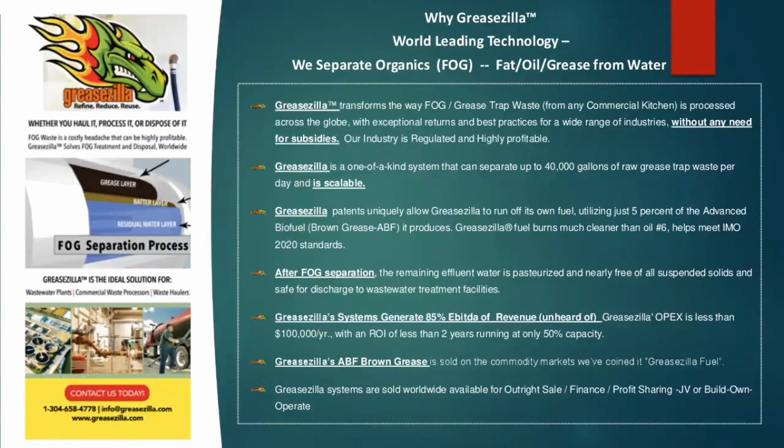It's actually a drop-in substitute for bunker fuel number 6, but we burn much, much cleaner and actually can help maritime fuel producers meet IMO 2020 standards. We sell the systems worldwide, outright sale, lease, finance. There's a profit sharing program we have. We will joint venture with communities, and we have a build, own, operate system as well. So we're very excited about our product and looking forward to increasing that penetration worldwide. Brian?

Excellent. For those of you that have ever been in the waste to fuel sector, you know, CapEx, IRR, return on investment, getting your hands on the feedstock, being able to sell the offtake in a practical fashion, permitting, emissions, these are all the intricacies, the devil in the detail in the industry. When Greasezilla was formed, it was formed by a waste processor who was trying to simplify the process. So our systems sell for less than $1 million, and as Bill said, with a 2-year return on investment.

When we started the business, we were focused more on the wastewater treatment infrastructure, dealing with cities and municipalities and state governments, and the hauling industry.

But as we all know, customers can take you down some interesting roads. So today we're proud to serve 5 different industry verticals. We are in the wastewater treatment facility. We will show you some of those in a moment. We deal extensively with commercial liquid waste processors and FOG haulers all around the country. But our product is ending up in the biodiesel sector, which we'll talk about a little bit further.

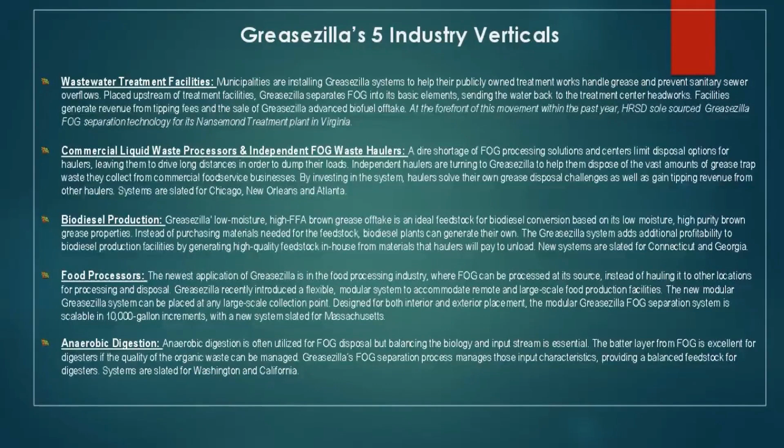The food processing sector: even during COVID, we may not be going to restaurants the same way we used to frequent them, but we are certainly buying foods from the grocery stores at increasing rates, and our systems are now sitting at food processing locations, upstream of anaerobic digester facilities, upstream of biodiesel facilities. So our customers are helping us to grow in areas that we never even conceived of in the early days.

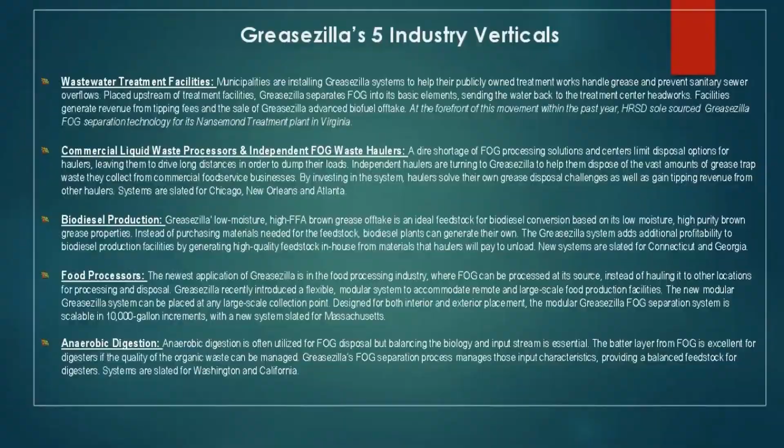Bill, could you walk everybody through what goes on inside the reactor? Yeah, imagine, if you will, trucks that are going to restaurants and pumping grease traps, 1,000 or 1,500 gallon grease traps, pumping them into the truck, going from 2 or 3 restaurants, and then going to a FOG receiving station, at which time they're going to discharge that truck through some type of a grate or screen that's going to get the occasional fork, knife, napkin, or brick, and keep that out of the system.

And then we recommend that that liquid waste goes into decanting. Grease worldwide is suspended in the solution at about 5% concentration, so you've got a lot of water in this liquid, and the more that can be decanted off to begin with is going to make the process that much more efficient. After decanting, this is a cutaway view of a 10,000 gallon tank, a reactor tank that we heat in our proprietary process for 18 to 24 hours.

And after that heating process, the system separates into the rich brown grease layer, then a batter layer. And if you will imagine a fried chicken restaurant or Mexican restaurant, Chinese restaurant, a lot of batter goes into frying. So think of your pancake batter, about 500 gallons of that as a layer, and then about 8,000, 8,500 gallons of pasteurized water. We harvest the brown grease off.

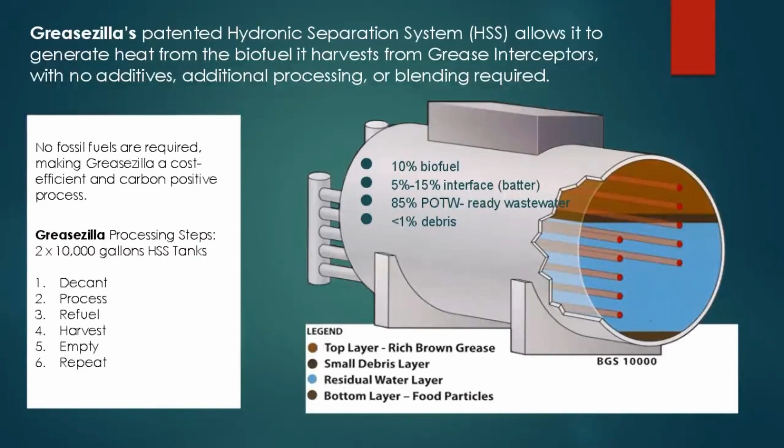Okay. We are in wastewater treatment plants in various locations around the country and the world. This is Wareham, Massachusetts, which is on the Cape, south of Boston, a very, very highly environmentally sensitive area. This system's been up and running a little bit more than 5 years now, at about 50% capacity. And one of the neat things that's happening with this site is the wastewater treatment plant is generating over $500,000 a year in additional revenue due to tipping fees and the brown grease sales that they're able to use for whatever purposes they need. Brian?

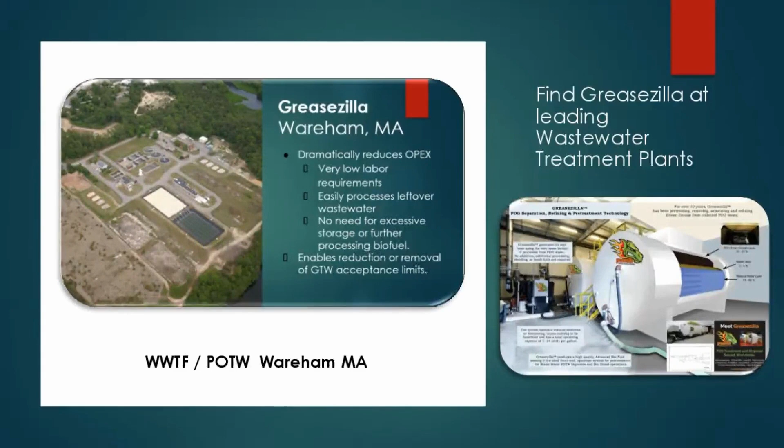So as Bill said, we are active in the wastewater treatment sector. Here is a facility that is recognized globally. This is Hampton Roads, a sanitation district in Virginia, near Virginia Beach. This authority happens to run some 20 different facilities. So they do push the envelope. They are testing technologies, and the world is watching. Greasezilla is very proud to be part of this prestigious environment.

And this site, which will open in 2021, was conceived by Hampton Roads Sanitation District and engineered by Jacobs Engineering. So this type of presence is helping us globally. One of the interesting aspects of this site, and I'm sure a lot of the people on this phone would recognize this as quite an unusual achievement: we were sole sourced.

So dealing with a state and dealing with a water authority, the commission sole sourced Greasezilla technology, primarily for three reasons. Number one, we were the only system that truly did run off of a small percentage of the fuel that it harvested. Secondly, we were the only company that really truly mitigated landfill policies, which the state was extremely focused on. And we were the only organization that would actually provide an aftermarket for the brown grease.

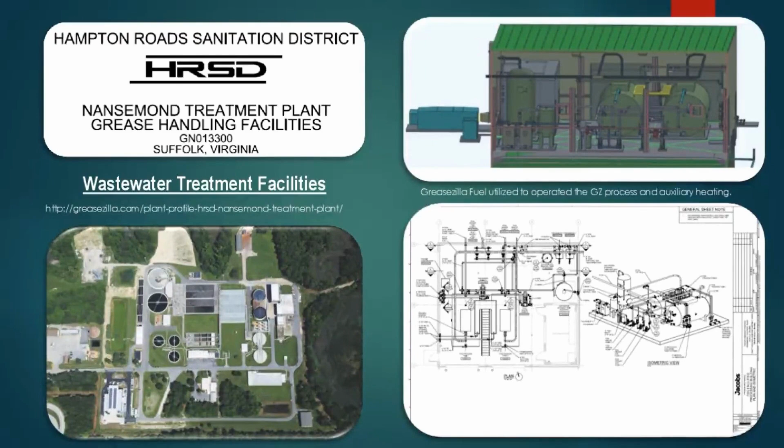So by burning our own fuel, landfill mitigation, selling the brown grease on behalf of the state, and feeding their digester the solids, we were deemed to be a unique organization, a unique technology. This is a $9 million facility. We are the heart of that facility. And I'll show you folks just a little bit of how that works.

So in a nutshell, going back to one of the earlier screens, in phase one, various vehicles are coming to the facility and they're offloading and going through some simple screening processes. In phase two, we are settling. So that material that comes off those vehicles that is agitated is going into a decant arena, a decant farm, which is preheated, by the way, and it is allowed to settle for 6 to 8 hours. Once it is settled, the clear water is moved directly to the headworks of the plant.

The gray water material loaded with FOG, fat, oils, and grease is moved into phase three, which is the Greasezilla Processing Center. It sits in that center for 18 to 24 hours. After phase three is completed, we discharge to the plant headworks. We discharge to the anaerobic digester. We discharge to the storage tanks for the advanced biofuel. And we discharge back to our systems to actually manage the heating process for the Greasezilla facility.

Again, our customers taught us something. Once we're harvesting biofuel from our own system, once we're using that biofuel to process and heat our Greasezilla reactors, this client was crafty enough to realize a second burner would allow it to heat the facility and heat the decant tank. So we are extremely proud of the relationship at Hampton Roads, Jacobs Engineering, I'm sure many of you have heard of them, and the fact that we were sole sourced.

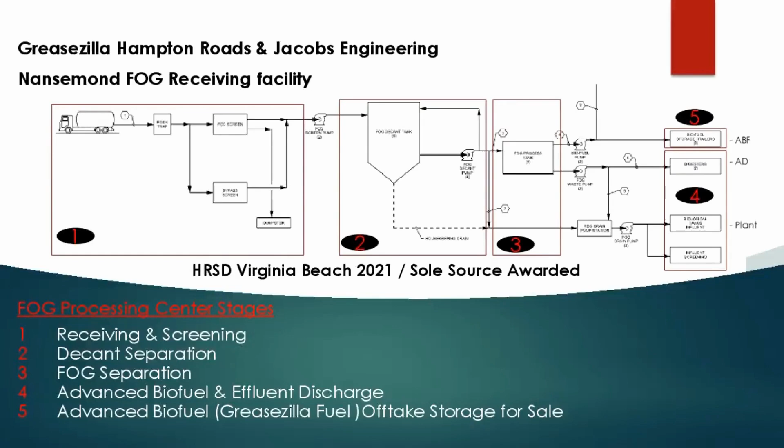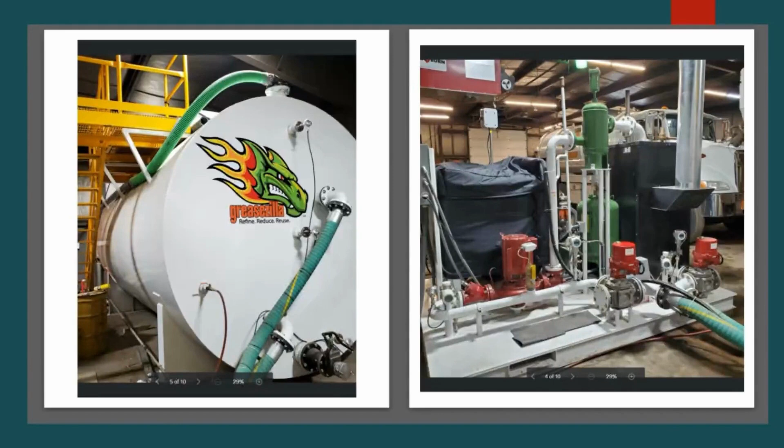Very well. So those of you that are in the renewable, the alternative energy sector, we know there's two ways to tackle these problems. One way is to bring the problem to the equipment, so bring the FOG to the system. But today, a more practical way is to bring the solution to the problem. So Greasezilla has created a distributed technology, a distributed format, where it is not only required for the fat, oil, and grease to be trucked into our facilities, but our facilities can now be located at food processing centers, anaerobic digester centers, lagoons.

Shopping centers are going through quite a transformation with COVID and e-commerce, and a lot of them are becoming food complexes, but they were never designed to harness that much grease. So now our systems sit at food processing centers and shopping centers worldwide. These systems can be shipped all over the world. One of the strongest markets for us now happens to be the Middle East, interestingly enough. And these systems can sit at remote locations with no grid, no power, no shelter.

So Greasezilla can now sit at a central location, but Greasezilla can also be moved in a modular fashion to remote locations, auxiliary locations, to where the problem is. And what we're finding in the food sector is these food plants are producing so much grease, it is slowing down their production, it is causing fire hazards.

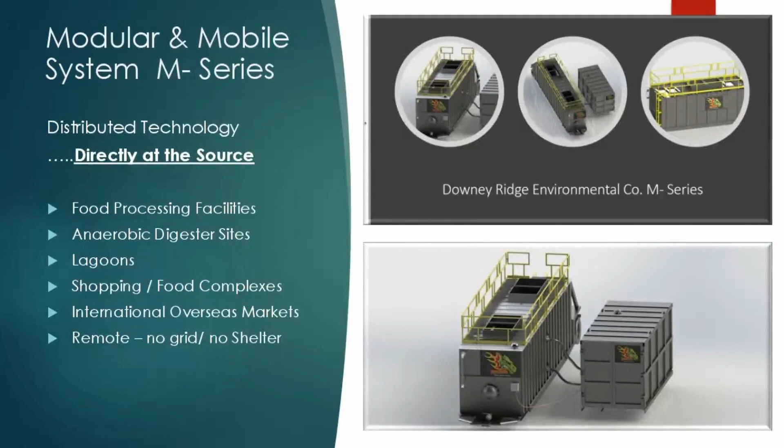Some of our clients are spending up to $1 million a year just to move the FOG out of their DAFs to landfills, whereas now we're able to put these systems at the food processors, avoid the DAFs, avoid the waste, avoid the landfills, and provide a return back to the food processing operations. So you'll see Greasezilla at government centers, you'll see Greasezilla fixed next to production facilities.

Our proprietary IP includes the hydronic separation system that we use in the process. We have fully automated heat transfer, and we heat by using the unblended biofuel that we've actually harvested from our own process, as we've shown in that video and prior slides. The brown grease that we separate has got a very, very low moisture content of less than 1%. We also have very low sulfur content.

And as we said before, we're sold as a commodity on the worldwide exchange. There are tax credits depending on where people live on this good earth, and just depending where you're at, how you can take advantage of those.

Worldwide, as Brian said, we are involved with clients in Thailand with retail malls that have been turned into food courts. We're involved with wastewater treatment plants in the United Arab Emirates and the Middle East. We have client interest from all over Europe, Australia, Africa, and Central and South America.

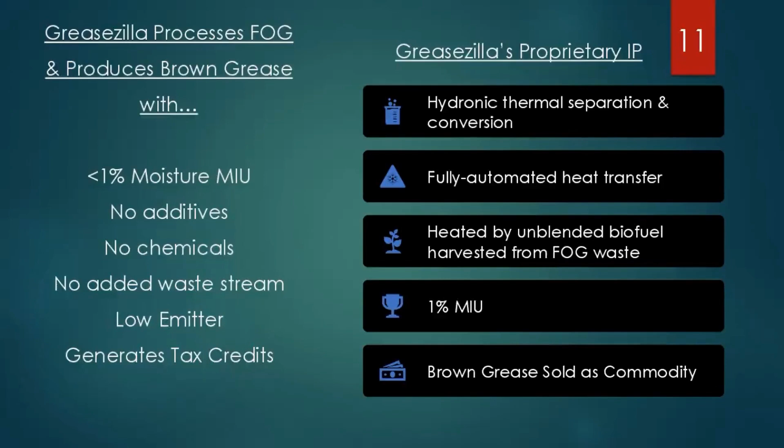Bottom line, grease is an issue worldwide. It's amazing how consistent the issue is, no matter what culture we're dealing with, and the amount of grease that's created per capita. And we do a great job recovering energy from a waste stream as well as cleaning up the water.

And with the help of very influential publications such as Biofuels Digest, the word is out. In the last 3 months alone, our organization has been inundated from the biodiesel sector. So the Greasezilla system sitting upstream of the biodiesel sector is reducing the return on investment of the biodiesel processing facilities by a factor of almost half.

By putting Greasezilla systems upstream of biodiesel facilities, the biodiesel operations are able to garner the tipping fees, which are quite appreciative, and garner the fuel coming into their facilities at no charge. So we've created a hub and spoke system in given urban areas. Our system is able to operate in urban areas. It's a closed system. The reactors are closed. We do not have the typical challenges of waste processing when it comes to odor and other derivatives.

But a day does not go by now where the biofuel industry is not coming to us, and the biodiesel industry is retooling to take brown grease in as a feedstock commodity, the feedstock being the highest cost issue for biodiesel producers. By putting Greasezilla hub and spoke in a given area, they are able to collect those tipping fees and have their feedstock generated on site.

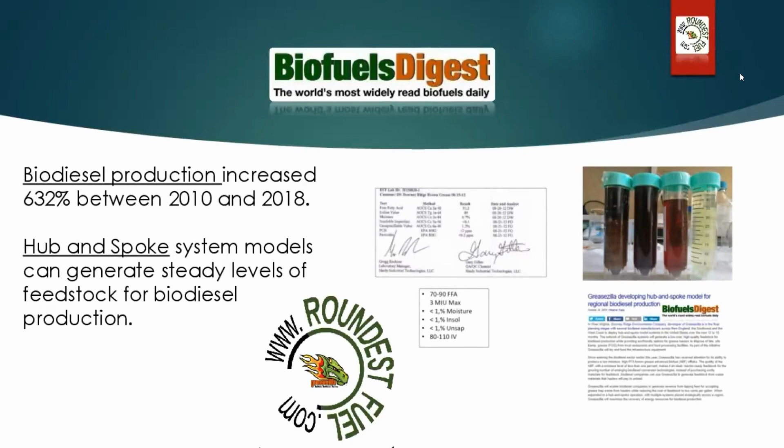This has been an exceptionally important development for the company, as we are now part of the roundest fuel economy, which is collect the waste in a locality, process the waste in a locality, and utilize the byproduct in a locality. So Greasezilla is proud to be one of the roundest fuels and proud to be heavily involved in the biodiesel sector. And our customers are teaching us every day how to deal with this high FFA material. This has been a very big development and a new important sector of our business.